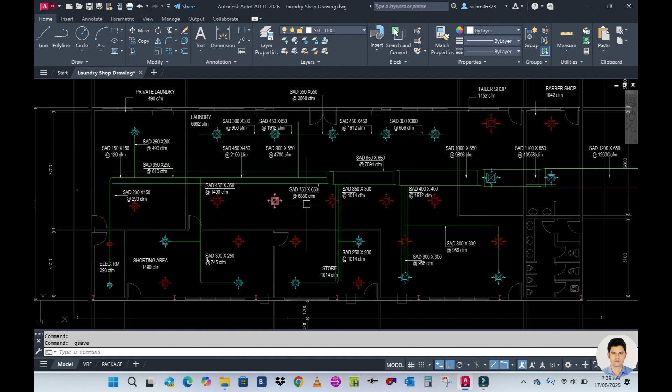So you can see this is one branch and the width of this branch is 900. So we have to offset 900 divided by 2, okay, each side 450. Okay, and TR trim this extra line. TR double enter, you can trim and draw one reducer here.

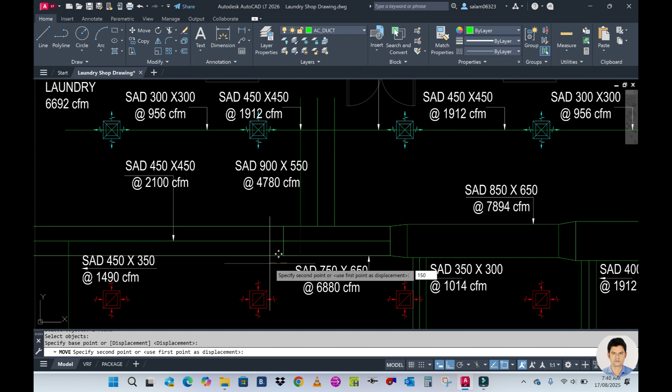So first we have to complete the main duct, then we will start the branch duct. Okay, now for move 150, go for offset 450. Okay, click this line and click this side. Now you can see this width of this duct after this reducer is 450 mm.

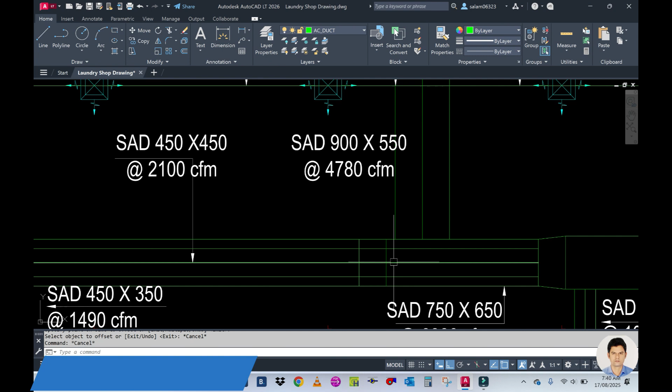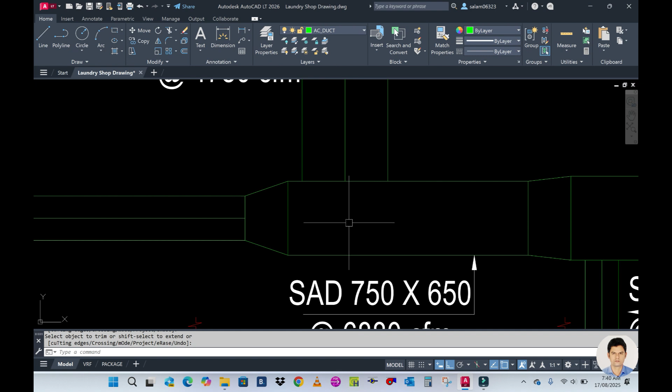So we have to offset 450 divided by 2. Okay, and draw a line from this point to this point. One more line from here to here. Now TR, select cutting edge and trim the extra line. Okay, here you go now. Okay, now select this cutting edge and trim the extra line. Okay, so this side is over.

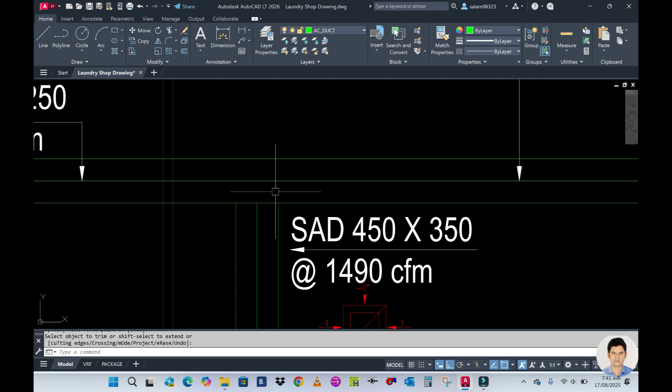Now here, move to this branch. So you can see that this branch width of the duct is 450. So over offset 450 divided by 2. TR double enter, trim the extra line and draw one more reducer here.

Draw one line from this point to this point and move this line at a distance of 150 mm. Okay, and then reducer length should be 450. So for offset and click this line and click this side.

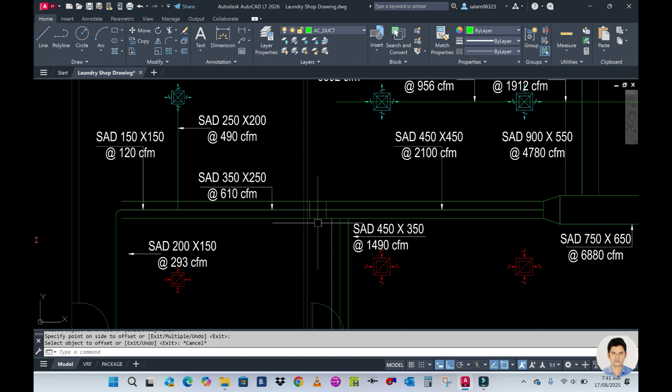And you can see this size, this at the duct side and duct width is 350. So we have to offset 350 divided by 2. Over offset 350 divided by 2.

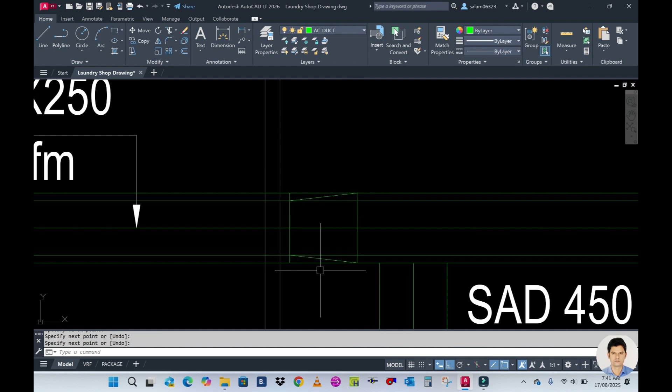Now draw a line from this point to this point. One more line from here to here. TR, select the cutting edge and trim the extra line. Very good. Now you have to trim this line as well.

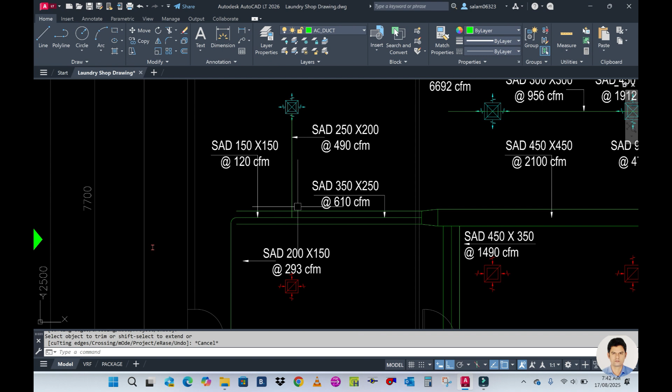Okay, so next is your this branch. So after this, there will be one more reducer. So here you can see this width of this duct is 250. So O offset 250 divided by 2.

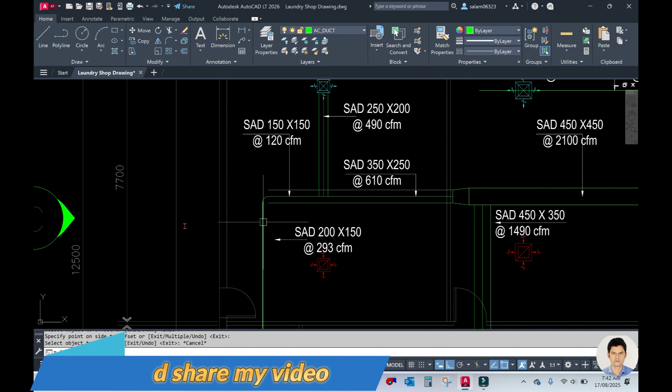Okay, and then here is you can see the width of the duct here, the width of the duct is 200. So we have to continue with this same duct. Okay, so here it will be 350 O offset 350 divided by 2.

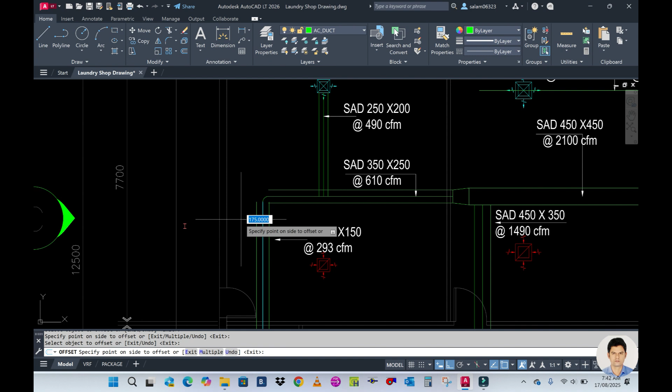We keep maintain the same distance, make it elbow here, then we can reduce it. So if fillet, we can use fillet command to make the radius here. Radius should be 150. And then O offset 350.

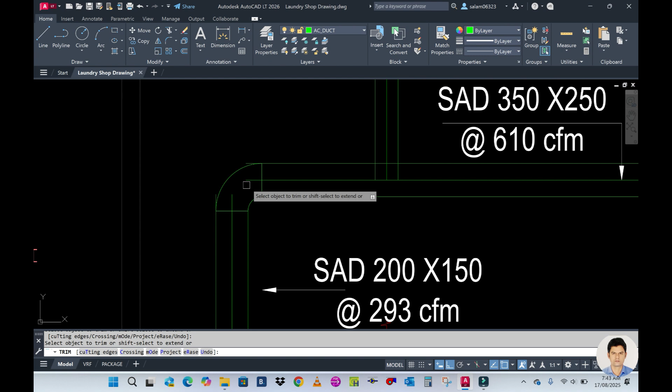Draw a line from here to here. One more line from here to here. Okay, now trim this extra line. Very good. Now save. Use Control S.

Save command. Okay, now we have to make one more reducer here. So O offset and offset at a distance of 150. Then reducer length 450.

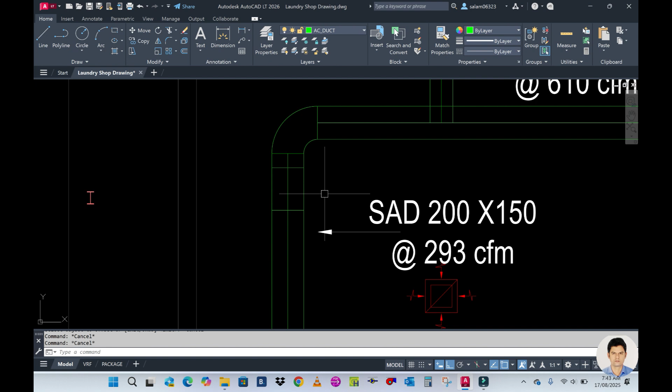Okay, and now offset this one. So O offset 200 means 100 each side. So enter 100, 100.

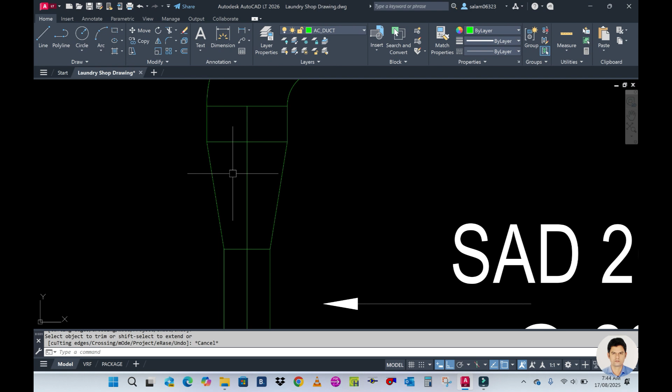Draw one line from this point to this point. One line from this point to this point. TR, select the cutting edge and trim this line. TR double enter, trim this one as well.

Okay, now you can see this duct is arrived up to this diffuser. So we have to connect this diffuser to this duct. So what I'm going to do, I'm going to draw a line from there to here and move this line at a distance of 200.

Okay, move 200. Okay, now extend this one. So EX for extend and B for boundary. Select this is the boundary. So I want to extend this two line.

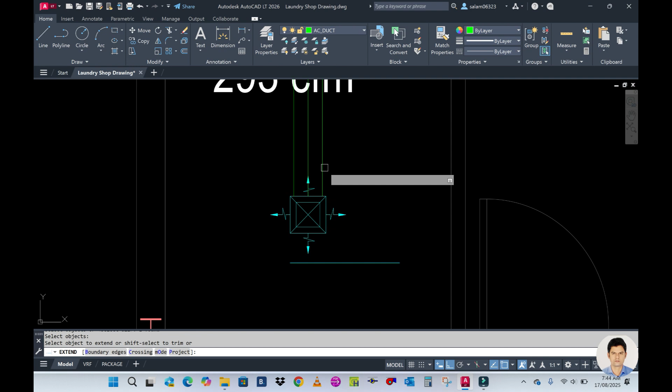Okay, now TR double enter to trim this line. So you can see now this diffuser you can connect in this duct easily and you can erase this center line. Okay, so this is over.